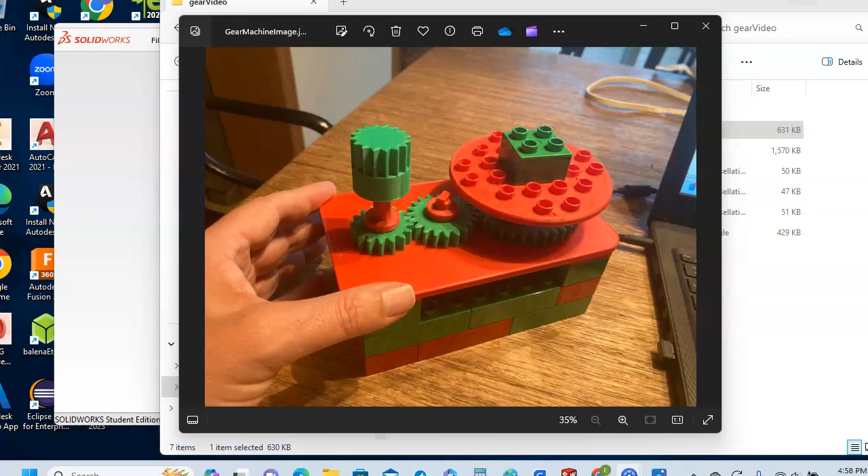Okay, here is an image of the machine. If I double click on it, it should open. Okay, here it is, and we'll try to minimize some of this other stuff so it's not cluttering up our background. Okay, in any case, here is the machine. As you can see, it's not real big.

If you twist this knob, the gears rotate and cause this turntable to spin around. You can apply any Lego compliant thing to the turntable, and when you turn it, it'll rotate. You can also apply the base to a Lego compliant structure, such as what you have here.

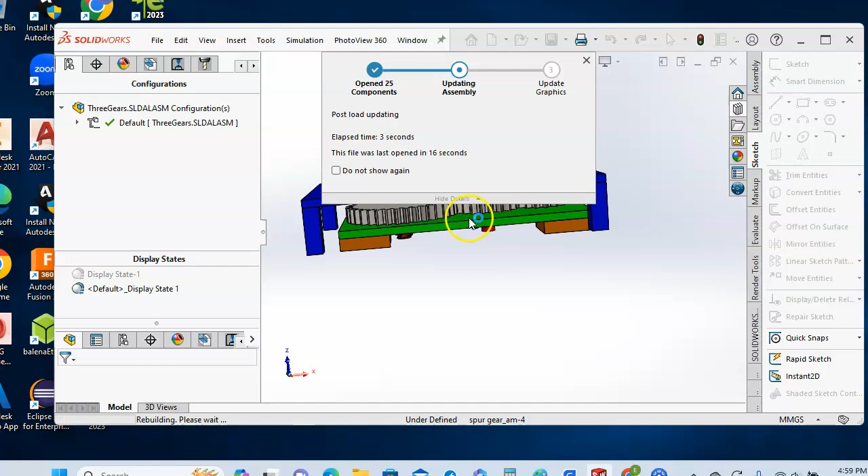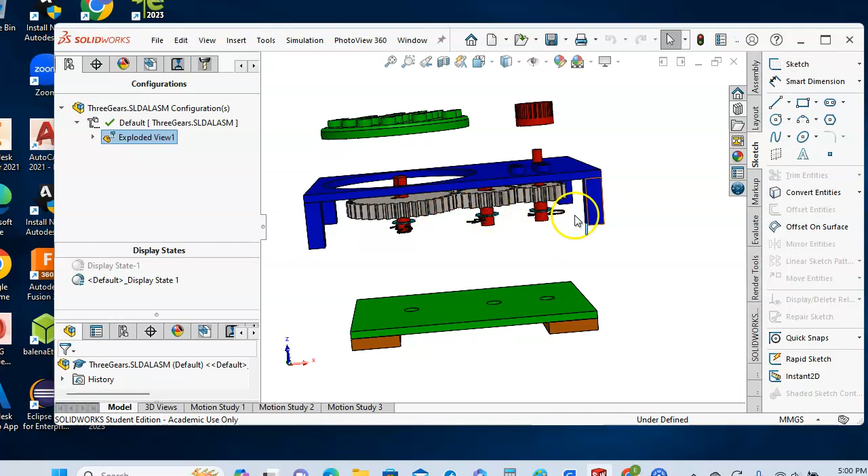So what we see is if we go into SolidWorks and open up our SolidWorks design, you can see the SolidWorks design of the actual machine. And if we open an exploded view, we can see it kind of blown apart here. This is the base. You can see the Lego female pieces allow for attachment to a Lego structure. Here's the turntable. If you rotate this knob, it turns the shaft. The gears are coupled, and if you zoom and rotate the view a little bit, you can kind of see. It's pretty obvious how it all fits together.

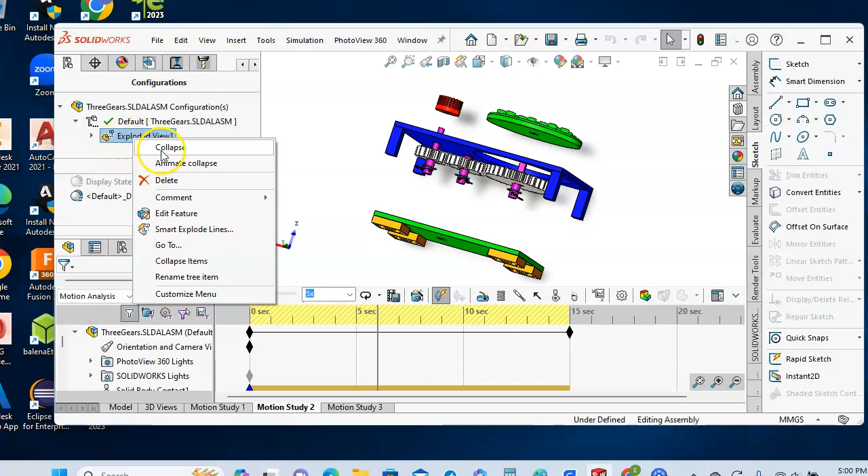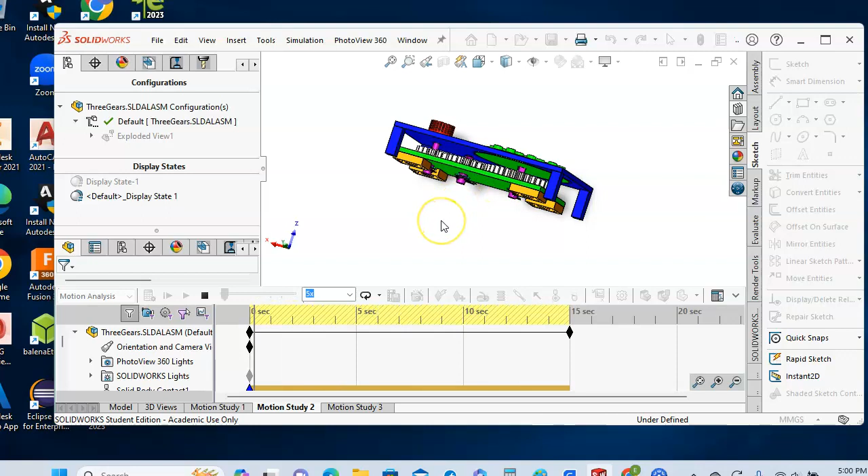So if we hit escape, the other thing we can do with this is we have a motion study. Let me collapse this back down to normal. We have a motion study which, if we run it, you can see that all of the gears actually rotate, and all the parts that are connected are rotating in synchronization with the gears. You can see here's the knob rotating, the turntable is rotating, gears and shafts. If you look underneath, you can see these pins that hold the shafts. They're also rotating. So that's pretty sharp.

What we're going to show in this video are the steps for how to do it. So if we minimize this and go back to our presentation and look at the second slide, we will see the steps that we're going to follow through in the process of this video.

First thing is we'll create a two-dimensional drawing to constrain the gears to a plane. Then we will add the 3D gear parts. We'll show the gears meshing and rotating in an animation. Then we'll set up for 3D printing of our parts using Cura. Then we'll add some additional elements to the design, such as the base plate, knobs and shafts, and we can create an animation of the complete machine in action.

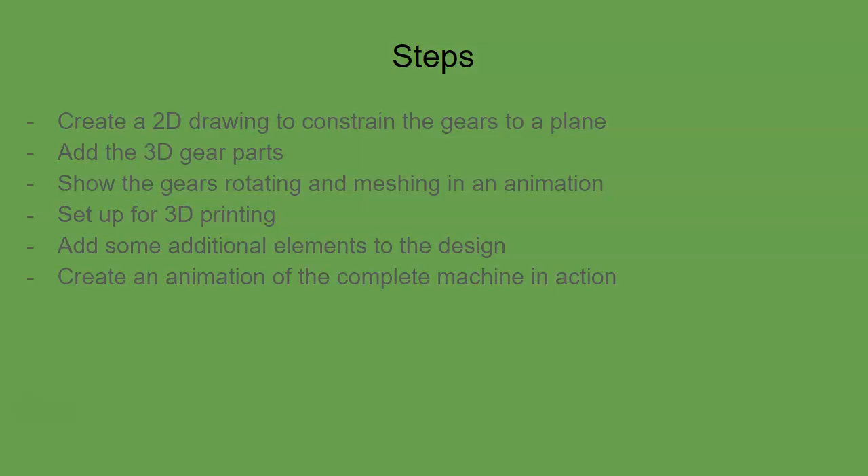Some of the steps that we do, I'm not going to spend a whole lot of time on, because it's expected that the viewer understands how to do relatively simple parts creation in SolidWorks. The steps that we're going to do are broken into 3 chapters. The first is using SolidWorks to create the gears, then using Cura to slice up the model, and then we'll create our motion study of the complete machine.

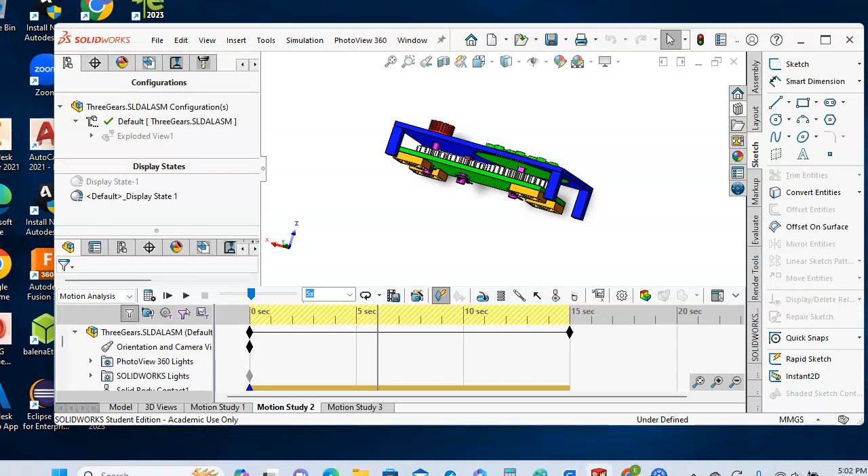So the first thing that we want to do is, once we are in SolidWorks, we can close this one because we already have it. The first thing that we do once we enter SolidWorks is go to Tools, Add-ins, and verify that the SolidWorks Motion and SolidWorks Toolbox library are both enabled. You have to click both checkboxes on the left side and the right side. But we've got them. We see that it's correct. We can cancel out of this.

So we will do File, and we will do New. We'll create a new assembly, and we'll just simply cancel out of this. We'll determine where we put it once it's started. Okay, the first thing is to make sure that we are using millimeters rather than inches.

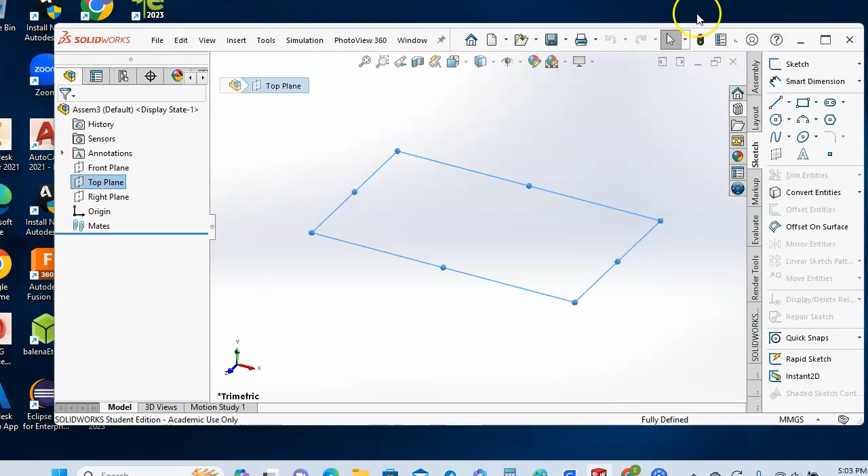Okay, we know that we will draw on the top plane. We will create a sketch. The first thing that we want in our sketch is a line across the screen. It's already horizontal. We will make it into a construction line. We want an infinite length. Okay, our line is good.

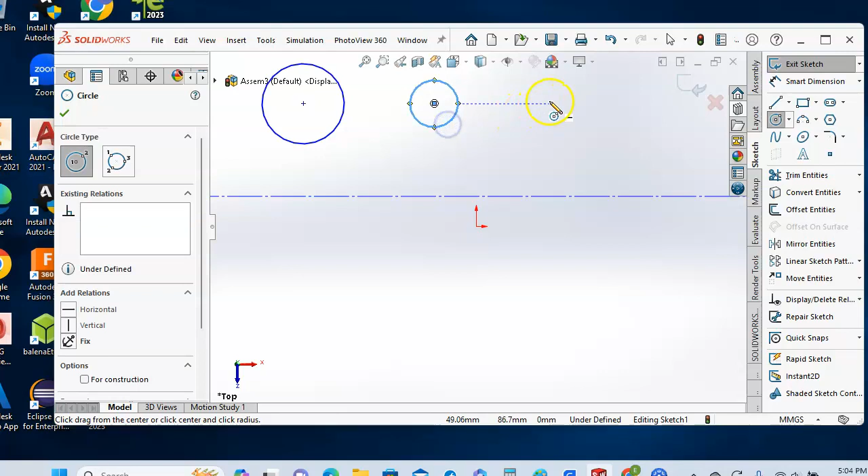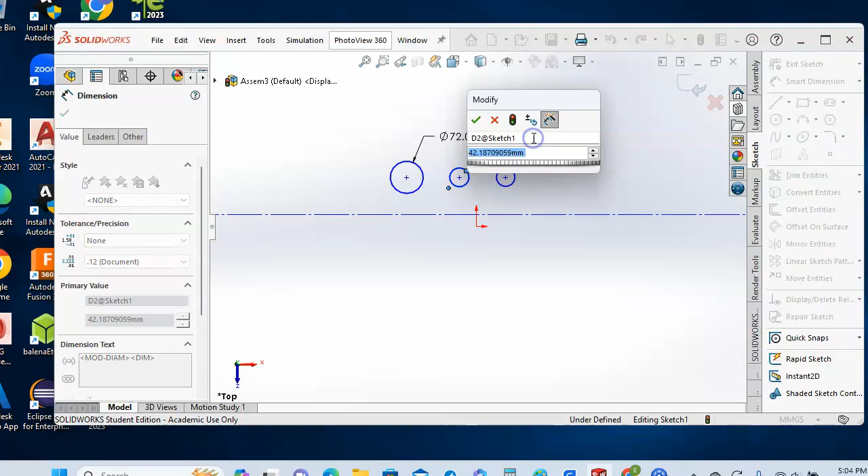The next thing that we want to do is create 3 circles: 1, 2, and 3. Okay, that's cool. Escape. We'll dimension them. The circles will have dimensions of 72, 40 millimeters, and the small one will be 34.

Okay, we're happy with dimensioning. Then we will create some relations. The first relation is between our construction line and the origin. It's coincident. Okay, we're happy with that.

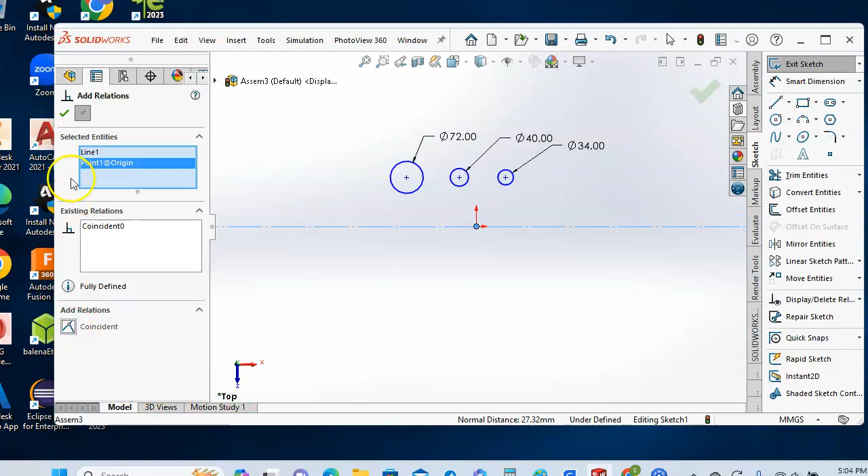Then we will select the center point of the large circle. We will add a relation, and the relation is one of coincidence. This will put the center point on the line.

In this case, we will select the midpoint of the next circle. We will... okay, and then we will. Are we good here or not? Okay.

Okay, point and line. Something's cattywampus here. I'm gonna start over.

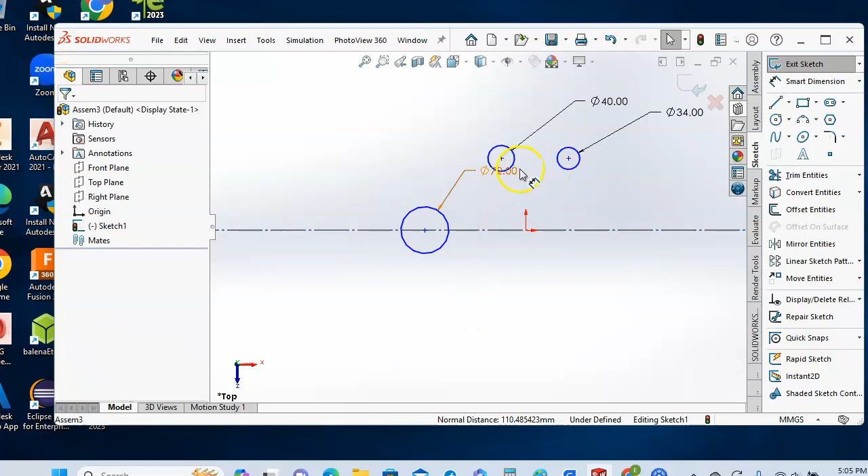Okay, we'll select the point, and we will add relation. We've got the point and the line. It's coincident. Okay, we're happy with that.

Okay, same process again. Select the point, add relation, and the line. Okay, coincident. Happy with that.

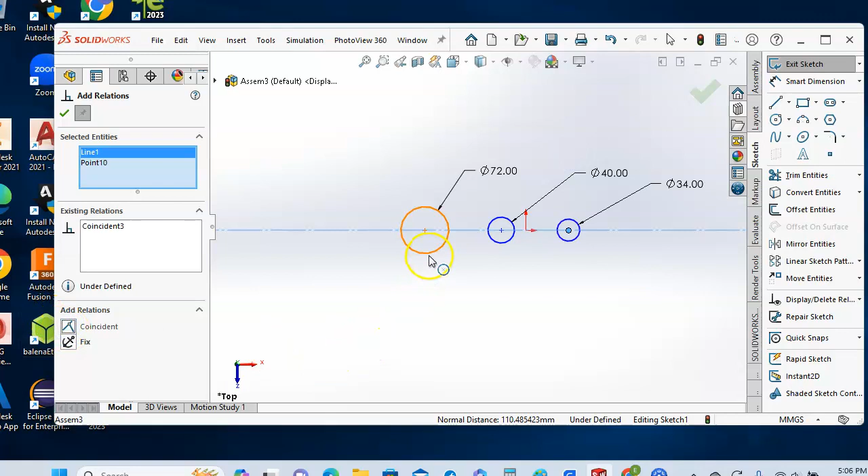So what we can do now is select the large circle, use our control key for multi-selection. We've got the 2 arcs, the 2 circles selected. We will say that they are tangent, and that's exactly what we want.

Now if we select the medium circle and our small circle, well, we better clear the selections. We'll select the medium circle. And if we hit Control, there we go. And we say tangent. Okay.

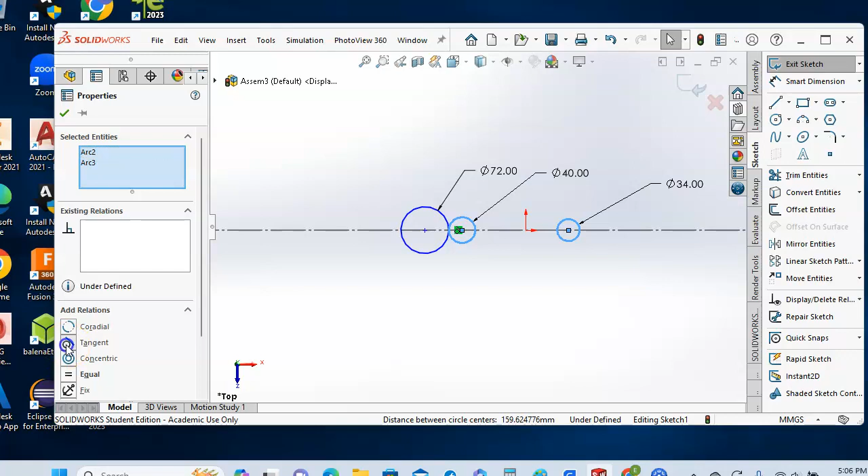Now we have our drawing. It's exactly what we want. So I'm going to exit the sketch, and I'm going to save it at this point because I don't want to lose what I've done.

Okay, GearVideo. We're going to call this 3 gears, and it will be a SolidWorks file. Okay, we've got our drawing in place.

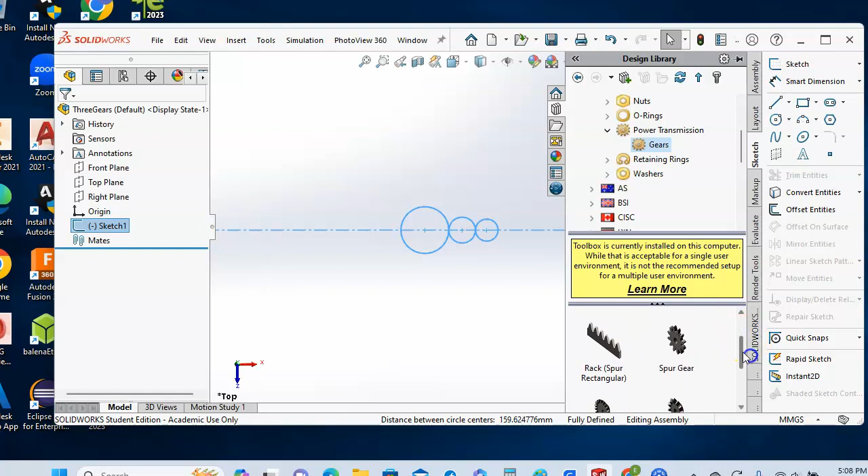The next thing that we're ready for is the actual gears. So we go to our design library, go up to the toolbox. We can navigate down to ANSI metric, go to power transmission, select gears, and the first thing that we want is a single spur gear. We'll drag it into our drawing.

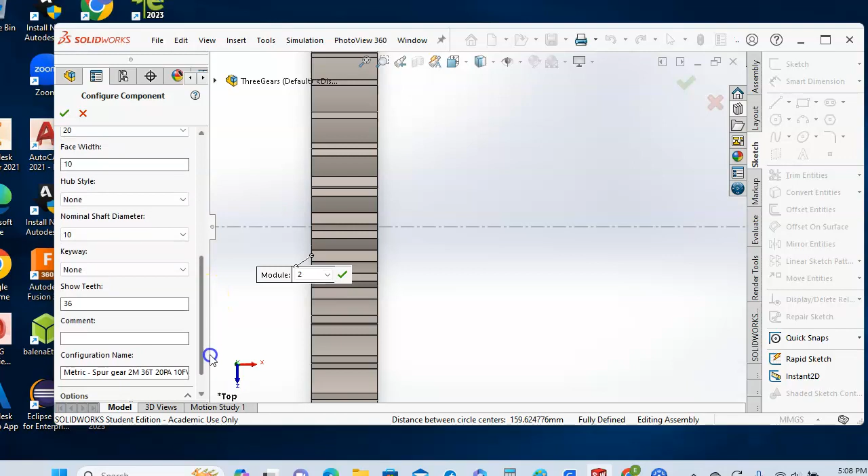All set. Now this will automatically open a dialog box that will allow us to edit our gears. By coincidence, this is exactly what we want. We want a module of 2, which comes with a diameter of 72 and 36 teeth. So 72 divided by 36 gives us our module, which is 2. We'll take a pressure angle of 20, face width of 10, and we don't want a keyway. So we'll say that gear is just the way we want it.

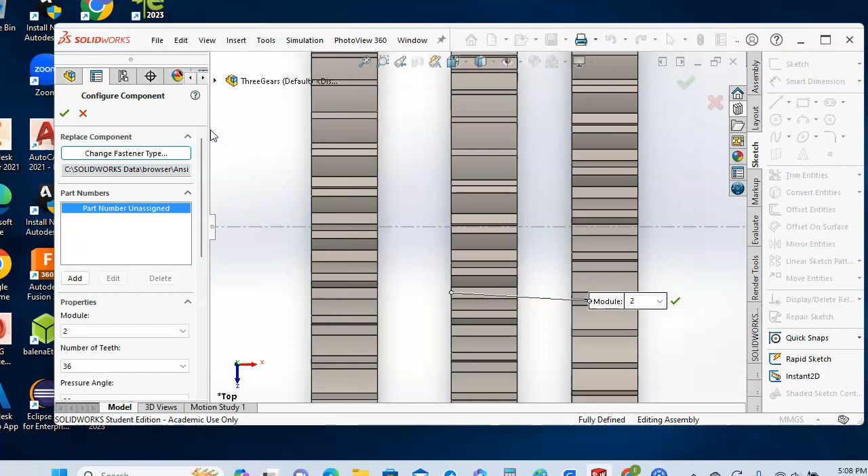If we right click, or click on our drawing, we can add our next 2 gears very simply. If we then select our middle gear, right click, and edit the toolbox, we know that this gear will have 20 teeth. So we'll scroll up with our mouse wheel, select 20. All the other parameters are unchanged.

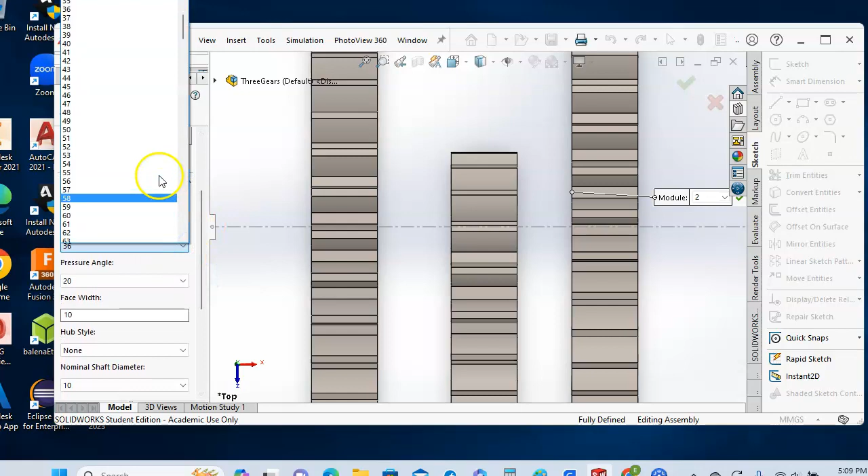We'll say that's good. We select our small gear, right click, edit the toolbox. This gear will have 17 teeth. Okay, there's 17 teeth. We're happy with that.

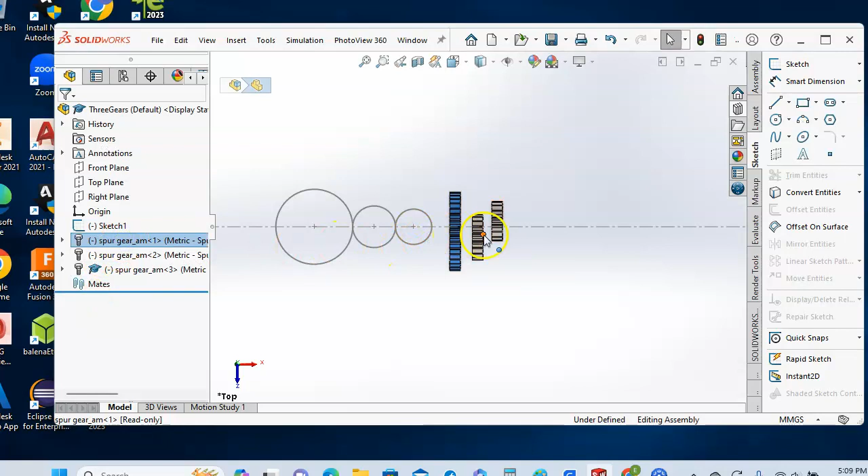Now the next thing we have to do is select our large gear, right click, and say float. Okay, this will allow us to move our gears into position, and we can position them where we want them. Now this process always seems kind of awkward to me. There must be something about it that I'm missing.

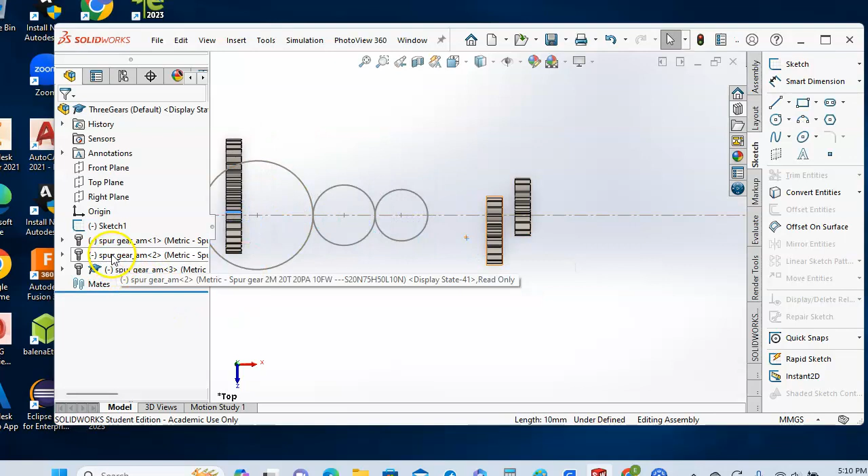We select the first gear, and there we go. Now we can move it. We select the second gear. We can move it. We can select our small gear and drag it over to where we want it.

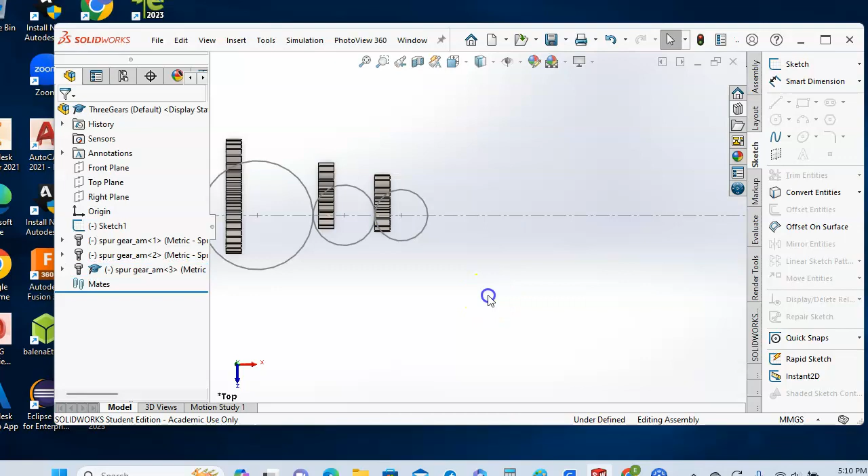Good. So now if we do a right click and rotate our view slightly, we can now see the bores of the gears. And if we hit escape to get out of selection, we can see that the gears are looking pretty good.

So what we're going to do now is save our work just so we don't lose it, rebuild it and save it. Then we're going to take a pause and jump to the next video, just so it doesn't get too long. Okay, hitting pause.